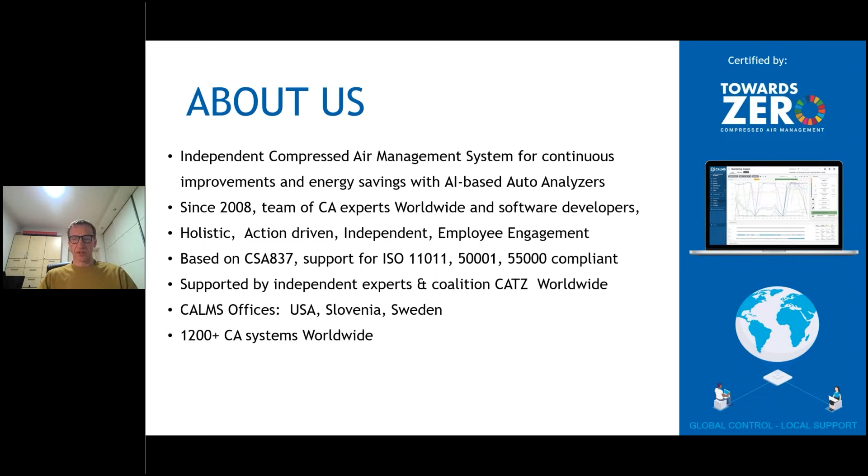So I work for CALMS, which is the independent compressed air platform, connecting different independent experts worldwide. Our system approach is based on a holistic approach, action-driven, independent, and we have more than 1,000 systems worldwide as a database to learn and to optimize different kinds of systems.

So what is the compressed air system? Compressed air system, as we see it from compressor manufacturer eyes, it's a big compressor room with a tiny distribution side, and also on a P&ID, normally we just mention the demand side.

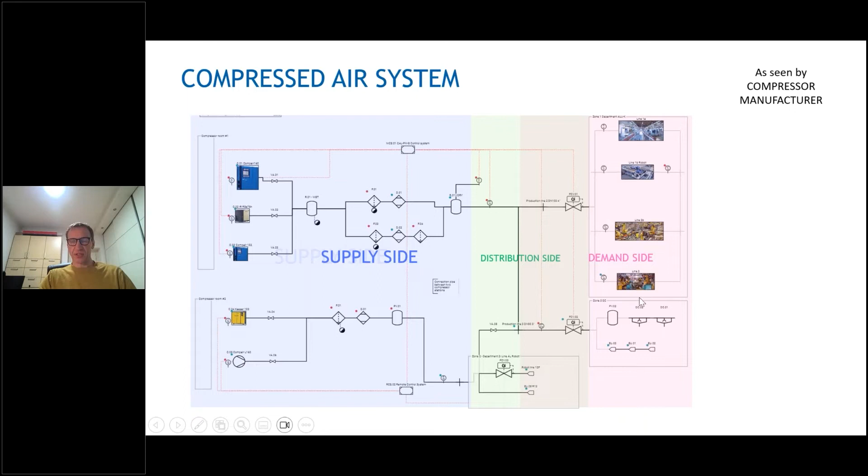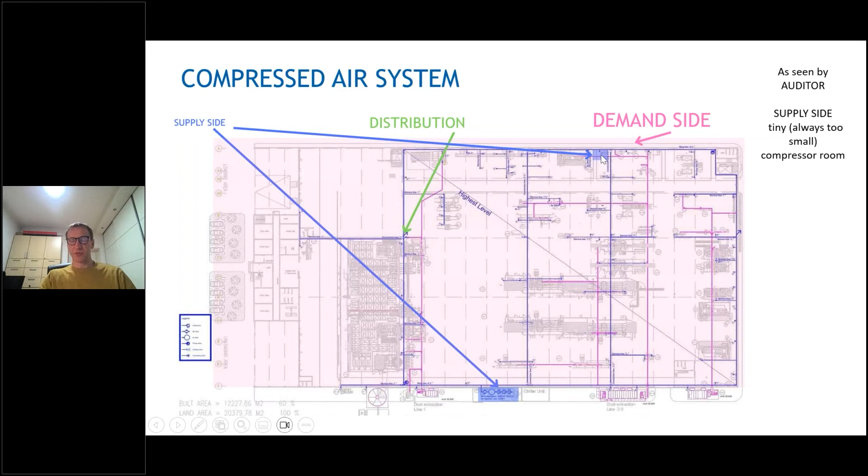But in reality, the compressed air system, as seen by a compressor auditor, is a huge demand side full of different compressed air users connected with pipes, the distribution part, and a very tiny compressor room in one part of the building, and maybe another small compressor room on the other side of the building.

So we would like to identify the savings. Where are the savings? Actually, this also depends on the eyes. If we see this from my eyes, when I was selling compressors, my cost for an energy audit was one new compressor or one new dryer or whatever equipment. So I was looking only in the supply side for the savings, and still 80% of all the auditors are looking for the savings in the supply side. But actually, the biggest savings are on the demand side.

We distribute this like this: 10% savings can be achieved on the supply side, 5% on the distribution side, and 20+% on the demand side. But the demand side is a large area, as you saw, and it's time intensive for assessments, for evaluation, and there is no capital investment involved with the demand side. So nobody has interest walking around, identifying the significant end uses, repairing them, controlling them, and so on.

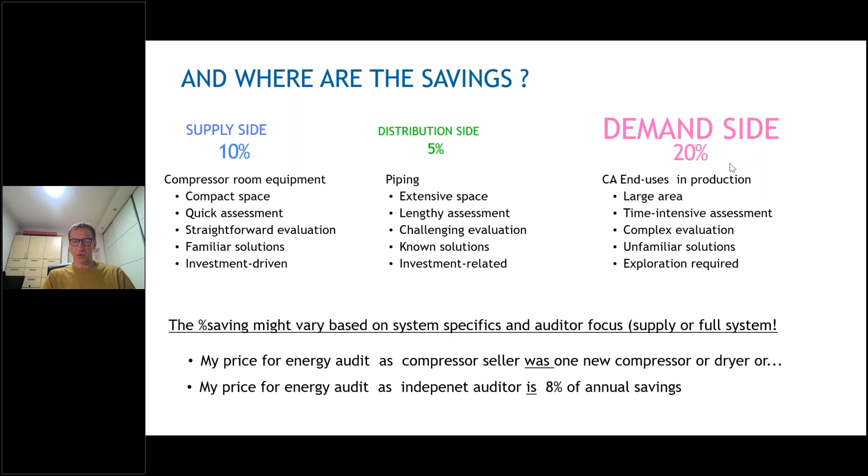So let's go further. How to approach the control and the management of a compressed air system. Our approach is in 3 steps. First, reduce the compressed air demand. So you have to do an audit followed by the repair of leaks and artificial demand. Then you go to the next step, find alternative sources, because compressed air is very expensive, 7 times more than electricity. So you try to identify inappropriate uses or tools, pneumatic tools that you can replace with electrical ones.

And when you have done this, you can come to optimization and the efficiency of use, where the controls also are. To do this, we built in CALMS a 7-step approach, starting with the system assessment, which is the system review, the first part. Then we find the potential savings, starting with an audit, which should include supply, distribution, and the demand side. Part of the audit is also a waste audit: leaks, artificial demand, and inappropriate uses.

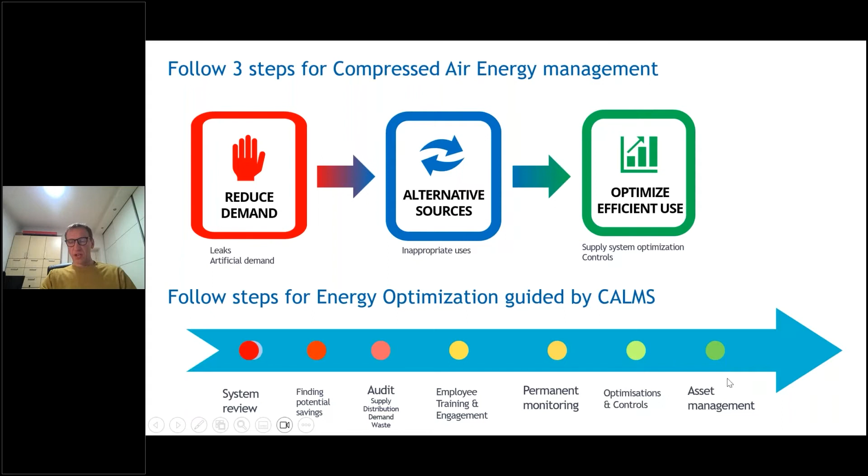And then we have to train employees and do employee engagement so that they all understand that we speak the same language, so that we understand what we want to achieve, set the targets, set the responsible person, and then we can build permanent monitoring, which actually is the base where we can start optimizing the system. And this is also where controls come in. And at the end, we need to identify all those savings. We have to start with asset management and total cost of ownership as well.

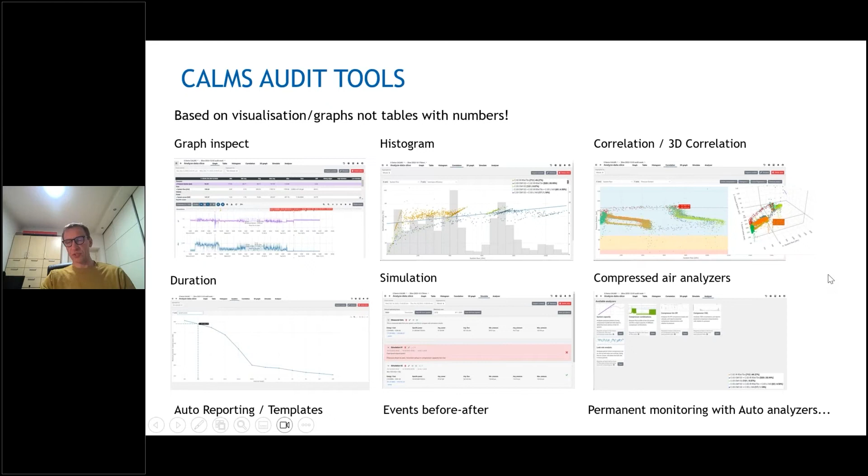There are many tools you can use in those processes, from graphs, histograms, correlation, 3D correlations, simulations, a very important part, auto analyzers, events before and after, reporting, permanent monitoring, and so on. So those are the tools built into the platform, which you need to audit.

And then we come to the control system, and there are some considerations that you have to be aware of. If the system is not well designed, you have too big compressors, too small compressors, too many, not enough compressors. With the control system, you will not solve these problems. And the expected savings can be from 2 up to 12%. So that's what you can expect with the control system in the compressor room.

You have to decide, consider the risk, reliability versus efficiency, and you always have to start with the audit. Then you do the simulation and write the correct functional specification for the system. In 80% of cases, you can solve this with a simple compressor controller bought from the OEM, but in some cases with a more complicated, bigger system, you need to go through all those considerations, try to fix the mistakes, and finish the installation with installation qualification, operational qualification, commissioning, create a maintenance plan, monitor and optimize the system.

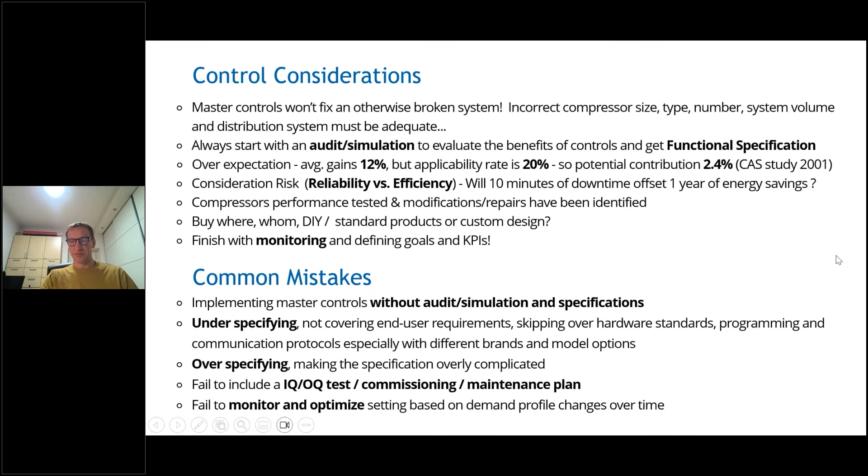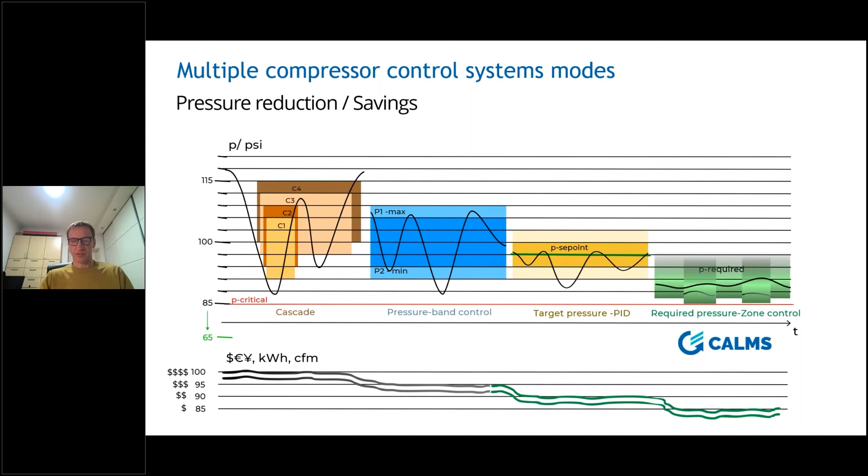So we are not controlling only the supply side, compressor room, but also the demand side, where are the biggest savings. You have to remember, and then you can come with the curve down. This is an example of control logic for a little bigger system with 2 compressor rooms. You have master controller controlling all the compressors with the logics that was described by Tim. Always controlling based on set point, pressure set point in the wet side in both compressor rooms.

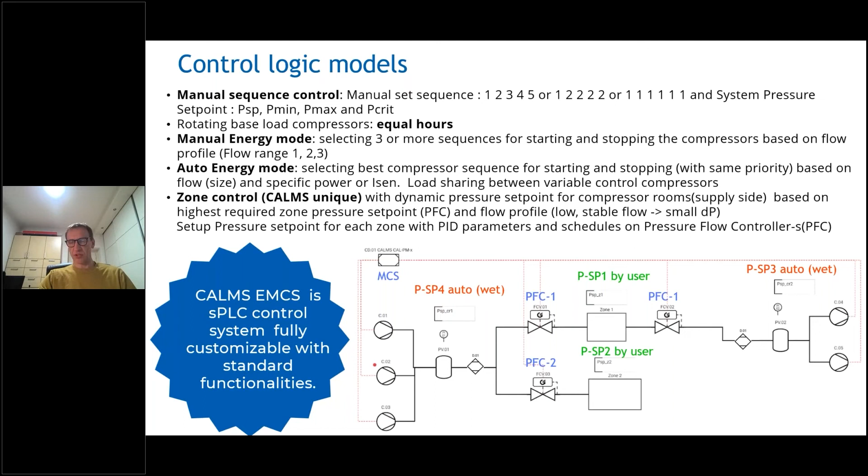And then you have different zones controlled by flow controllers, and they report to the same master controller, sending the variable dynamic set point. So the set points in the compressor room are not fixed. They are based on different zone settings. So you can close one, you can shut down one zone, you can have a lower pressure in one zone. And with the flow controllers, the ability to control the complete system is much broader, and the savings can be achieved overall with reducing the artificial demand.

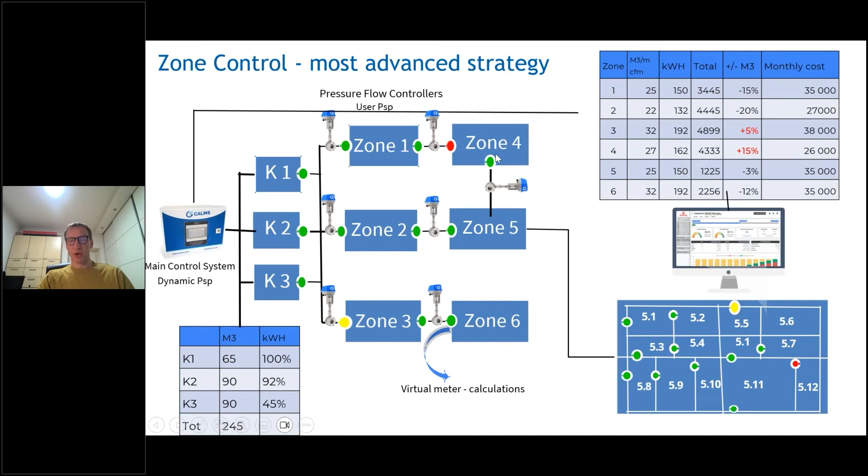So this is one example of how this zone control works, and all the zones are then evaluated with the baseline. If there is some increase in the baseline, you can connect this with the leaks or demand profile improvement, so you can focus on the zone that has a problem. Here is just one chart. What I want to say is that even with the zone control and target, you have to be careful, because the control system, the master controller, must be aligned with the flow controllers in each zone.

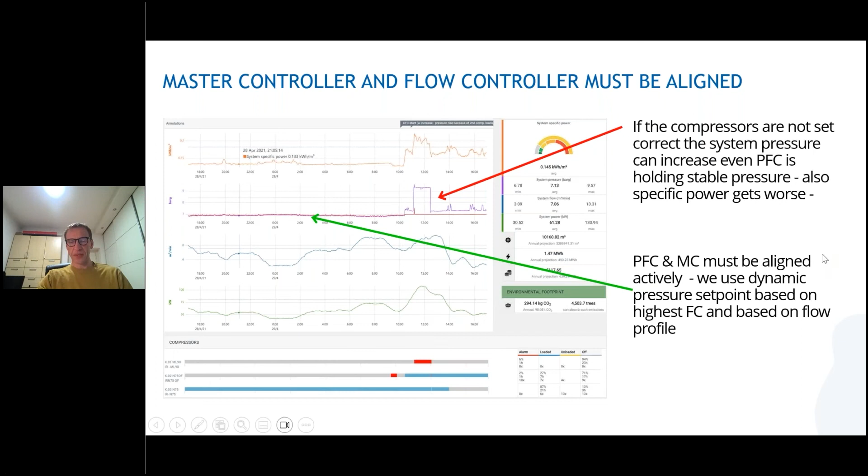So, for example, here operation is very good, they are aligned, and here we simulated that the pressure at the demand side in the zone is stable, completely stable, but in the compressor room it starts to increase, and this causes also increase in specific energy consumption as well. So it's very important to avoid these problems. And at the end, you have to consider the monitoring before-after situation with the events. So you have to evaluate the savings based on the targets.

Here is one example. We are doing this based on IPMVP, International Performance Measurement and Verification Protocol. So we set the baseline, then we adjust the baseline and compare the baseline with the reporting period and see daily savings and CUSUM on average savings.

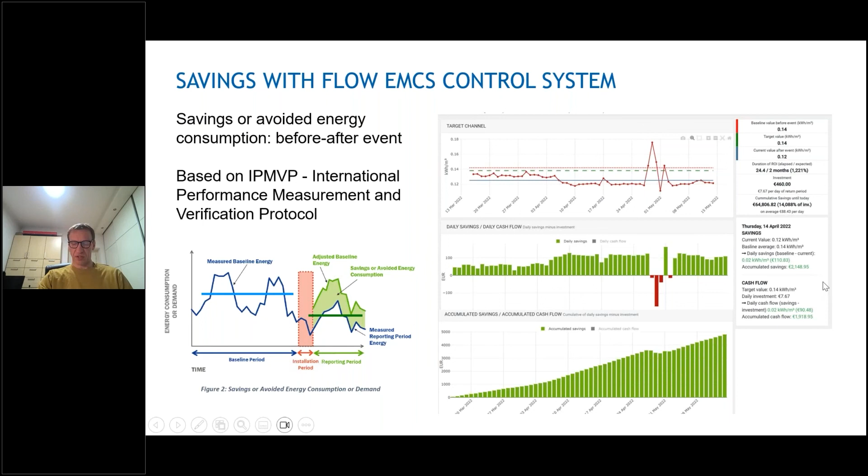This next question is for Gorazd. This one came from Matthew. If I am networking controllers, where should I be controlling the set point from? After the dryers or at the compressor? What is your ideal way to network compressors together?

So for a distributed system with multiple compressor rooms, we always control the compressors with the set point near the compressors, on the receiver in the wet side. The end pressure is controlled by the flow controllers for different zones, and they are connected together with the same PLC, which is controlling the demand side and the compressor rooms dynamically. So the set point is changing. The set point is not fixed in the compressor rooms, but it's changing. But it should always look at the wet side in the compressor room.

I was going to add, that's a very modern and really new technology that he's recommending, and I think it's great. There's also systems where there's a simple controller in place, and sometimes the different pressure differentials between the different dryers make it hard to use a variety of wet side control pressures. So some systems have to use dry side pressure just because of the simplicity of the system. So you have to set in the right biases, the right differentials for the dryers.